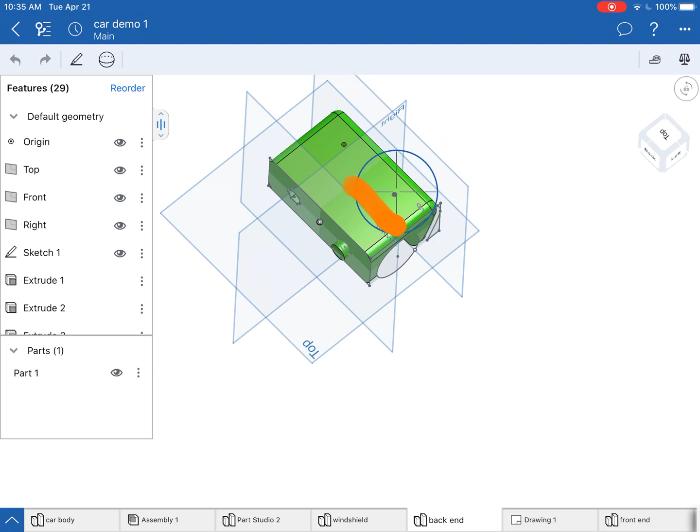I've made some little exhaust pipes, the cutout for where the wheel's going to be, and then obviously how it's going to be able to link in to the other part of the car. You'll notice on mine too, because I was going to put that fin on there, I created a couple holes for that fin, these guys up here. I've created a couple holes for that back modular thing to be able to slip into to create another design element.

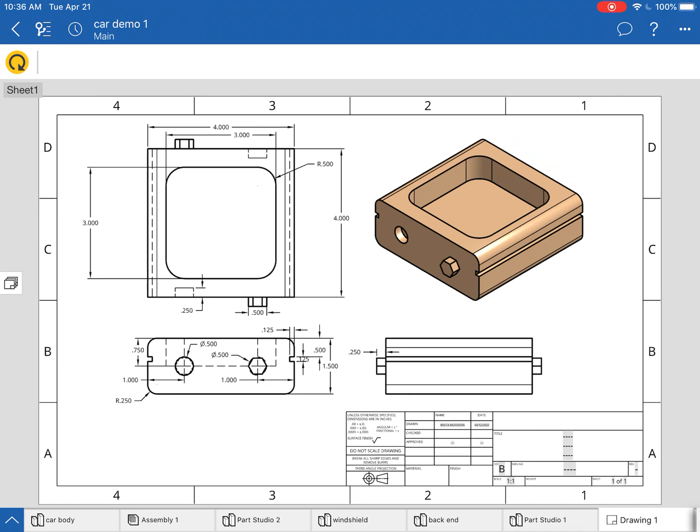All right, so let's get started. I'm going to go up here to the up arrow and hit the plus sign, and I'm going to create a new part studio. And that'll give me a blank area to work. Looking at the drawing, and I know some of you, when you click on the drawing tab, the drawing isn't opening up, so just make sure you have that PDF that I put on Canvas available to you to be able to open that up. You can see it's even taken a while on mine.

If I zoom in, this is the profile that I want to create. So I have 1.5 inches tall. I have 4 inches across, and then these little pieces, I have the circle on the left side, and I have the hexagon on the right side. The circle diameter is both 1/2 inch. The hexagon is inside of that circle, okay?

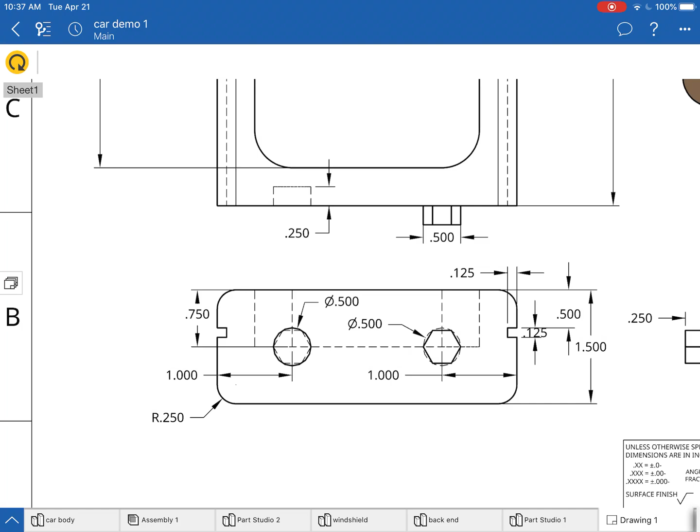You notice that they're located on the midpoint or the midline of that piece, and they are 1 inch in from the outside edge. There's also a 0.25 radius around the edges. So I kind of have those memorized. You might have to be flipping back and forth as you lay this thing out. Okay, so let's go into our part and get that set up.

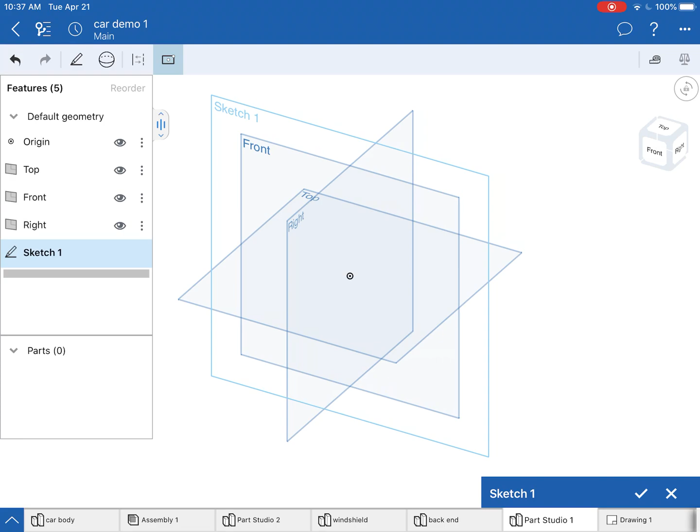I'm going to do a 2D sketch. I'm going to focus on the front plane. So I tapped on the front plane, and I'm going to do a center point rectangle. I'm always doing center point rectangles, and you'll see why. I use these planes as mirror planes when I have a feature flip over. So it's good to start everything on the center.

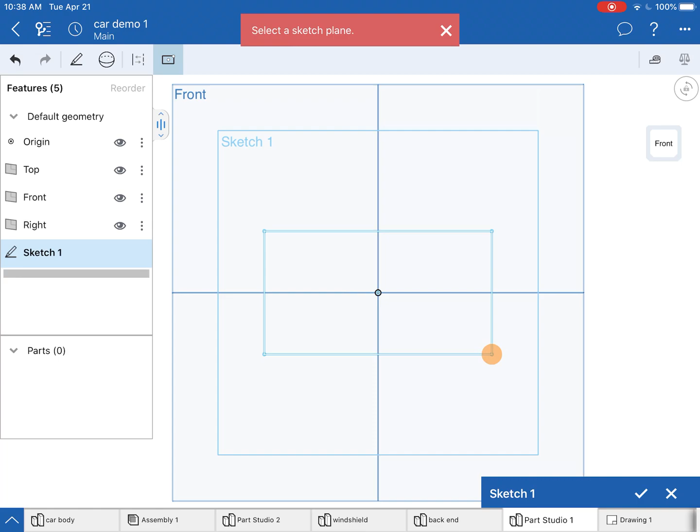So I'm going to tap with 2 fingers on the background and then click View Normal to Sketch Plane, and that'll open that up. Let me go back, choose that center point rectangle again. It wants me to pick my plane, center point rectangle. I'll start in the center on the origin, then I'll tap out here just to give me a rectangular shape, and then I'll add my dimensions to it. I'll add my 1.5 inch dimension over here, and I will add my 4 inch dimension over there.

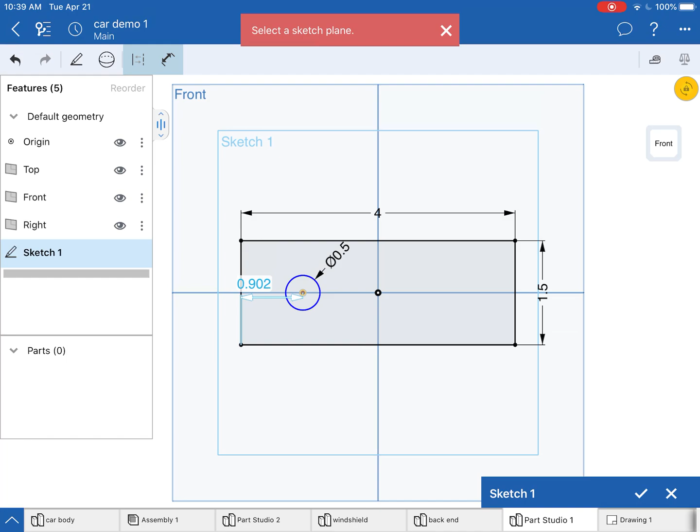Okay, and then I'm going to lay out those circles and the hexagon for this thing to be able to snap into. So I'm going to do a center point circle, and I'm going to hover right in there, click outside to create my circle, and dimension that circle to be 0.5 inches, and I want that circle to be, you remember if you press and hold, that will give you the precision tool. I want that to be 1 inch from the outside. Okay, now over here, whoops, go back to my sketch tools.

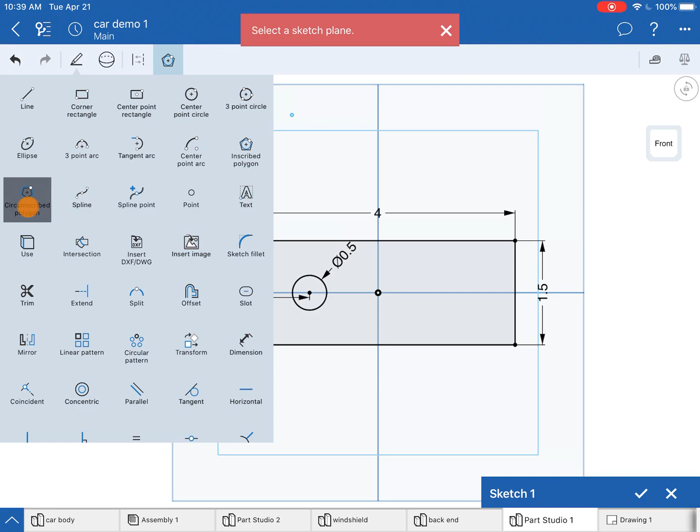I want a circumscribed polygon, this tool. Up here there's an inscribed one where the polygon is on the inside of the circle. That's not the one I want. I want the one with the polygon on the outside of the circle, this one over here. I'm going to lay the center of it down right there, and I'll click on the outside, and there it says 6. If I wanted to change the number of sides, I can tap on that 6 and change it, but I don't. 6 is what I want.

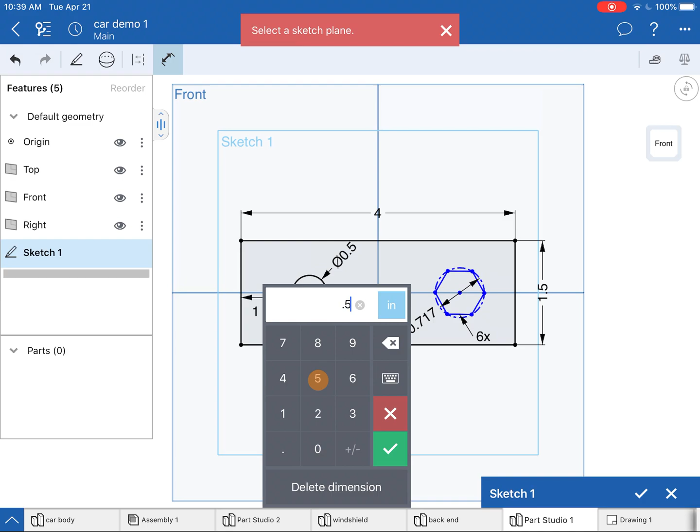I'm going to create my dimension, and I'll click on the outside of that circle, and that dimension is going to also be 0.5, and the dimension to the center point is going to be 1 inch.

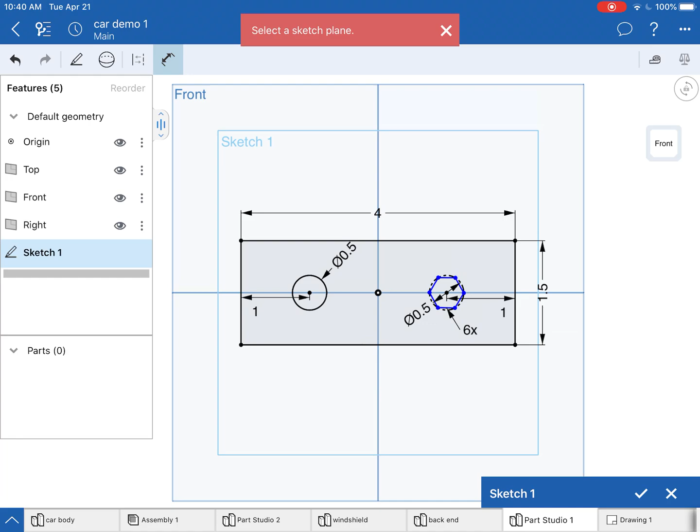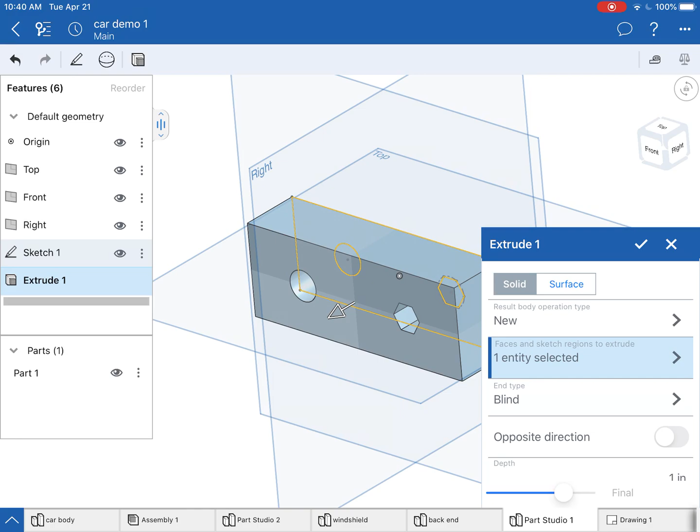All right. At this point, I want to do some extruding. Because I want the circle to be on the left, I'm going to extrude away from me right now. So I'm going to hit the 3D button, extrude. I'm going to click all 3 of those things. Okay, all 3 of those points, and I want to go in the opposite direction.

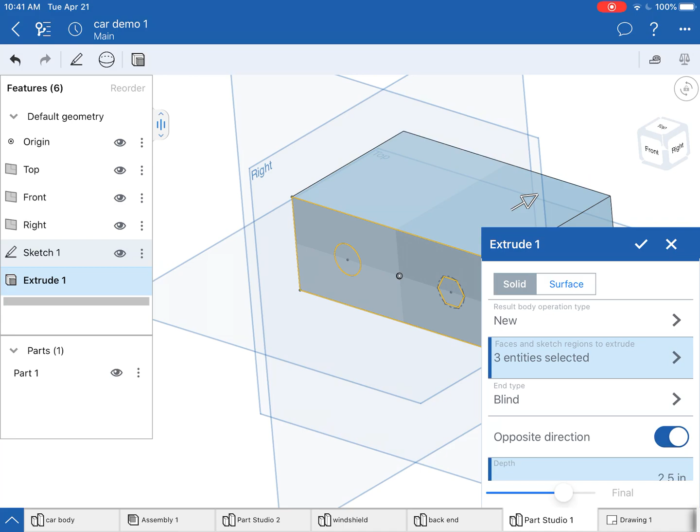And I want this to extrude. I don't want it to be as long as the front or the center, so I'm going to choose 2.5 inches. And here's where you're just going to have to consult your design to know if you got a long back end or a short back end. All right, and now I'm going to finish that extrusion.

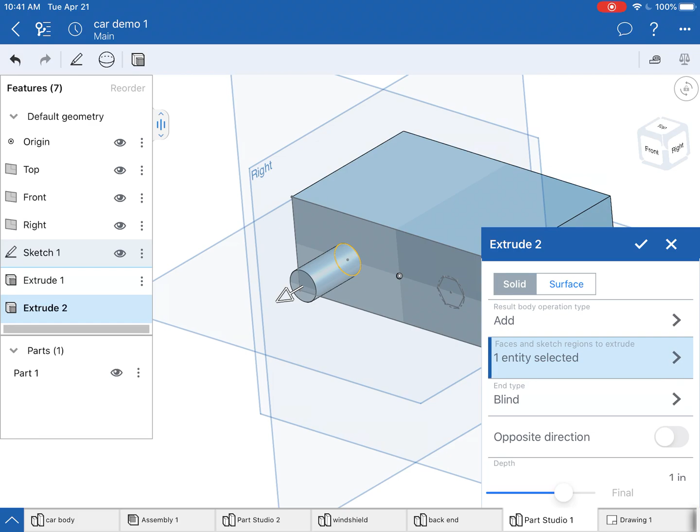And if you notice, the circle and the hexagon kind of went away. So I want to turn on the eyeball for that sketch again. And I'm going to do another extrusion. I'm going to extrude, and I'm going to click on the circle. And the circle I do want to stick out away, and I want that to be 0.25 inches. I'm going to finish that extrusion.

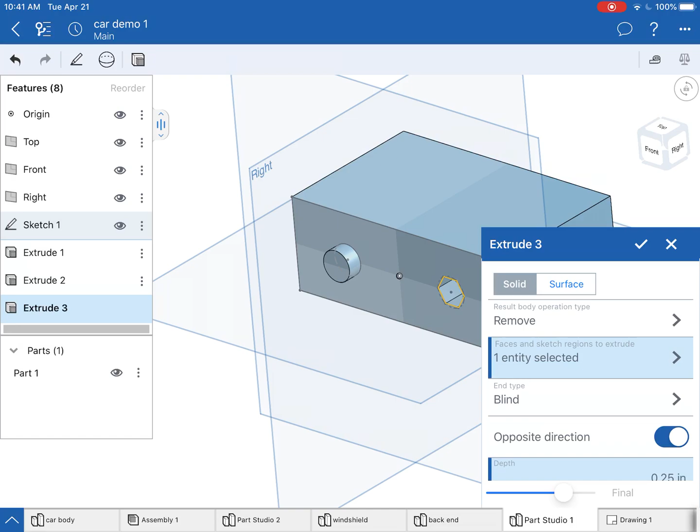And then I'm going to hit the 3D button, extrude again. And now I'm going to click on that. And this time, instead of adding on, I want to remove, and I want to remove 0.25 inches. There we go. So now if we look at my car body, you can see that it'll snap right in line.

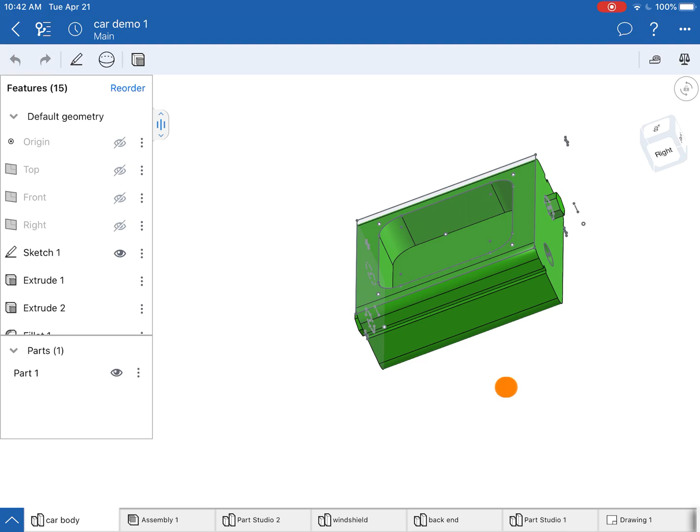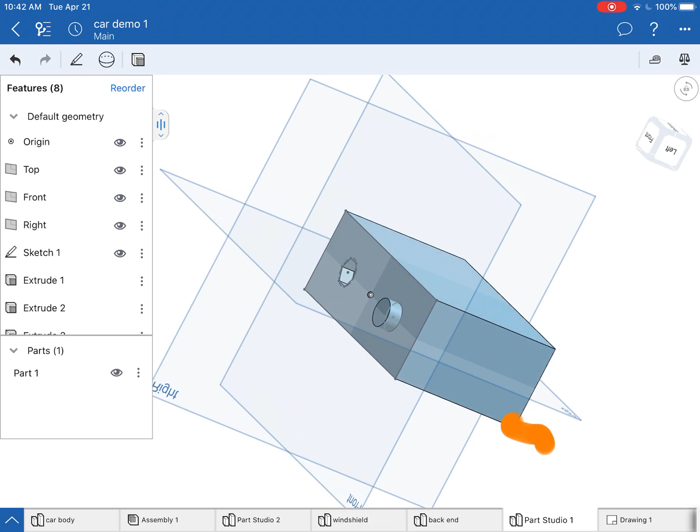If we notice this though, now that I'm looking at it, it looks like I need the circle to be on the right side of the vehicle and the hexagon on the left side of the vehicle. So that's going to cause me a little bit of an issue, but let's see what I can do. I could, if I wanted to, just flip that over. Now everything is upside down, but now the hexagon and the circle are on the appropriate sides to be able to snap in there. Hopefully you can see what I'm talking about.

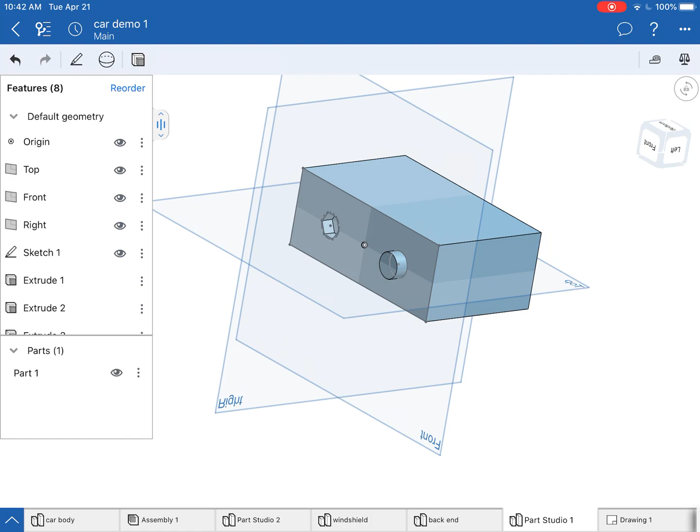All right, so I'm just going to keep that upside down at this point. I could start over and move those things, flip-flop them, but I'm just going to leave it like that. All right, so my next sketch, it's asking me to select a plane. I am going to choose this plane right here, the back profile. Double tap on the background, view normal to sketch plane.

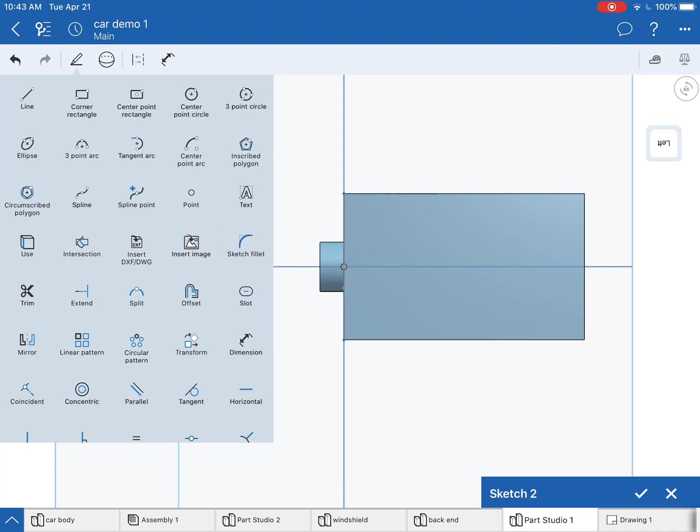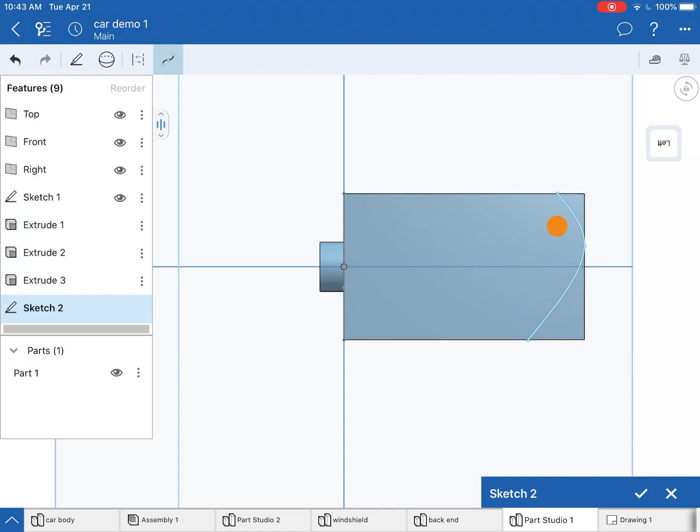Good. And I'm going to choose my spline tool, and I'm going to create kind of a curved shape to the back. So I'm going to use my precision tool to pick an area back in here underneath the car. And then I'm going to come up and choose an area back there. And then I'm going to come over and pick an area right there. I want to cut all that off. You can change those around if you want, but I'm going to cut all that off.

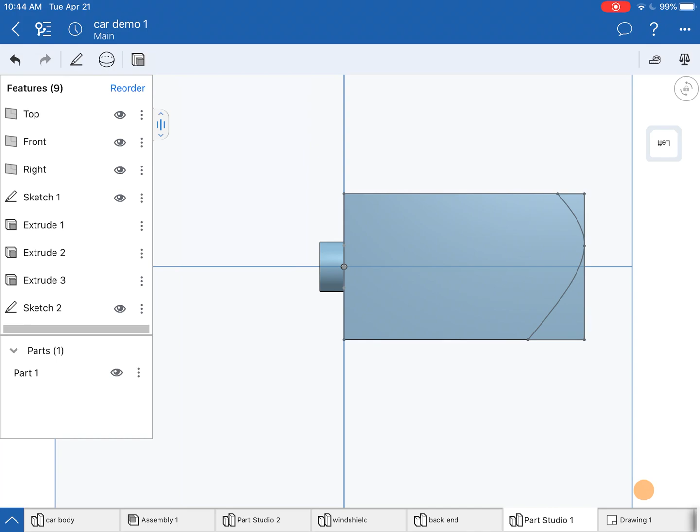So in order to create a closed shape, I'm going to go grab my line tool now, and I'm going to snap around to all of these points to create a closed off shape. And I'm going to finish that sketch. Okay, now I'm going to go to extrude and cut.

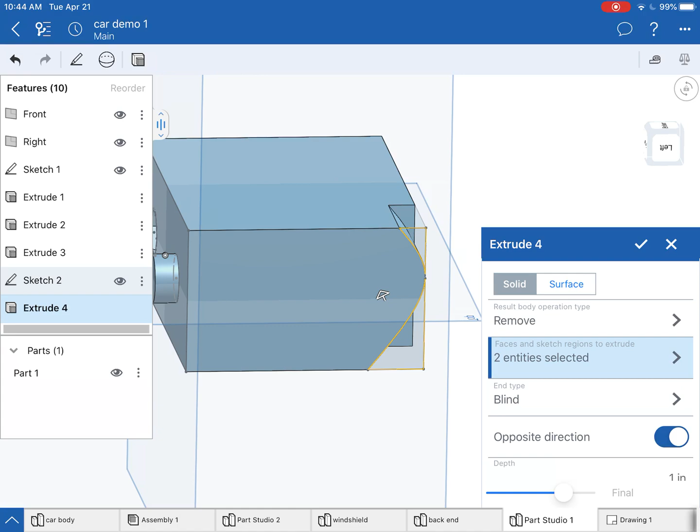Go to remove, get that thing visible. I'm going to choose that section and that section. And you notice it's only going back 1 inch. So I want to change it from being a blind extrusion to through all, and finish that extrusion. There we go. That changes the back end of my car a little bit.

Okay, now I'm going to do another sketch on this plane. Make sure you select the right plane. If you rotate, you can make sure that you're on the side of the car. Sometimes you get kind of lost on what plane you're actually clicking on. I'm going to double tap and view normal to sketch plane. And now I'm going to create a cutout for my tire.

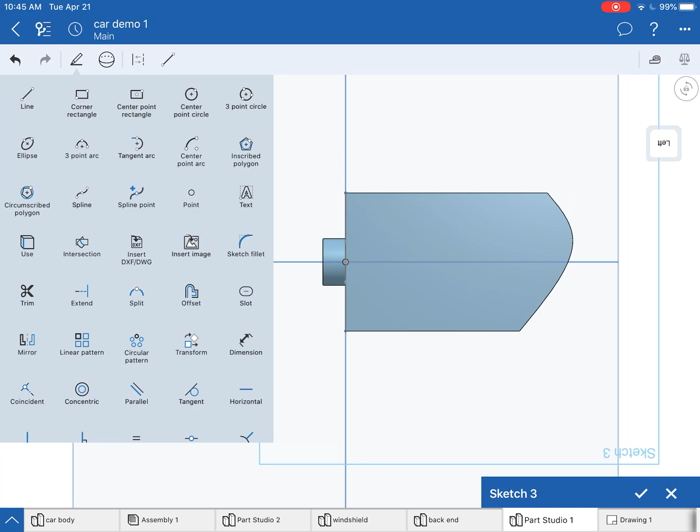So I'm going to create a center point circle. The wheel is not going to be in the middle of the car. It's going to be near the bottom. It's going to be something like that.

Now, if you've forgotten what your dimensions are, you can go back to your initial, or I should say, if you have a partner on this thing, you're going to have to communicate with your partner. They're going to have to share their part with you. Let's see.

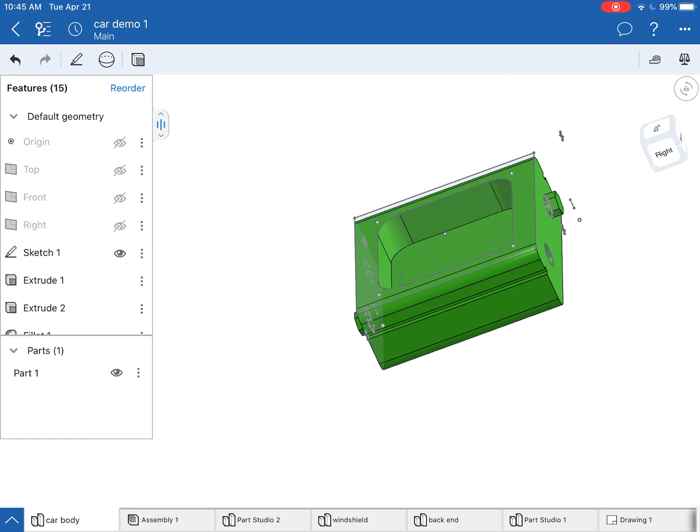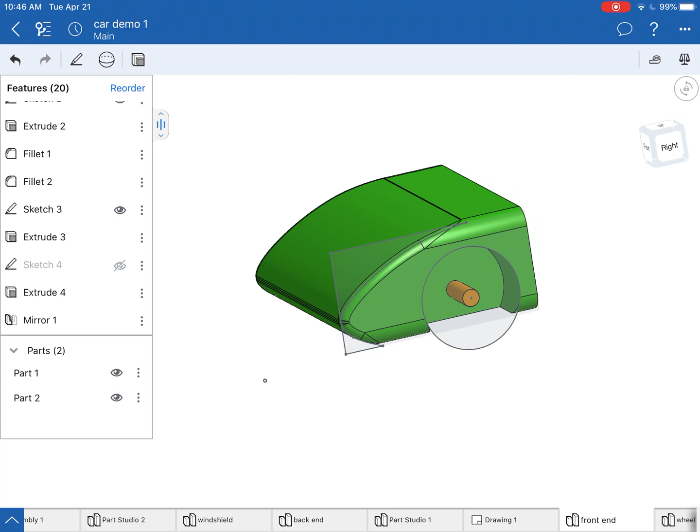There's the front end of my car, and you can't see any dimensions on here. So I'm looking for the eyeball, that eyeball that has a circle on there. If you just click on these eyeballs, you can see what sketch is associated with it. So if I turn on this eyeball, I can see that's my wheel cut out. I'm going to hit the three dots next to it and say show dimensions.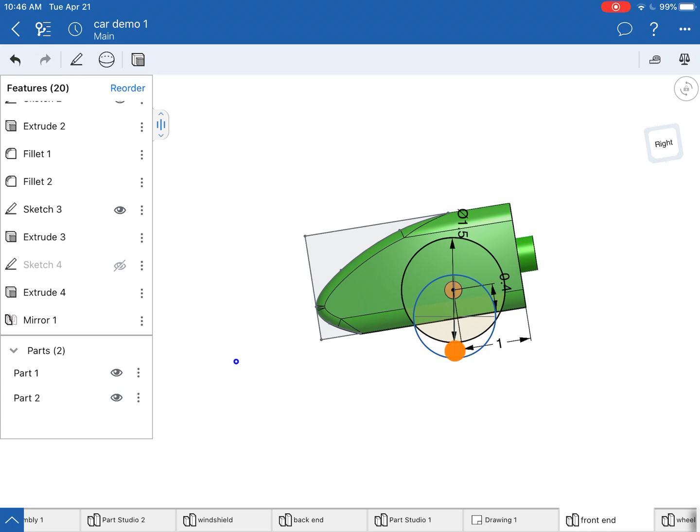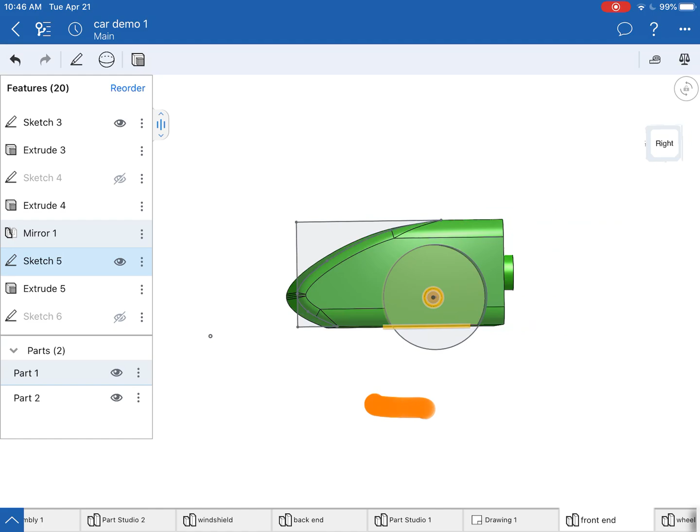There we go. So this shows me that I have a 1.5 inch circle on the outside, and I have 0.4 inches from the center point to the bottom. And I remember that I made a 1/4 inch circle hole for that axle to fit into. You can find the sketch that I did that in as well. I think it's that one, sketch 5. I can show dimensions on, and you'd be able to see what I used for that dimension.

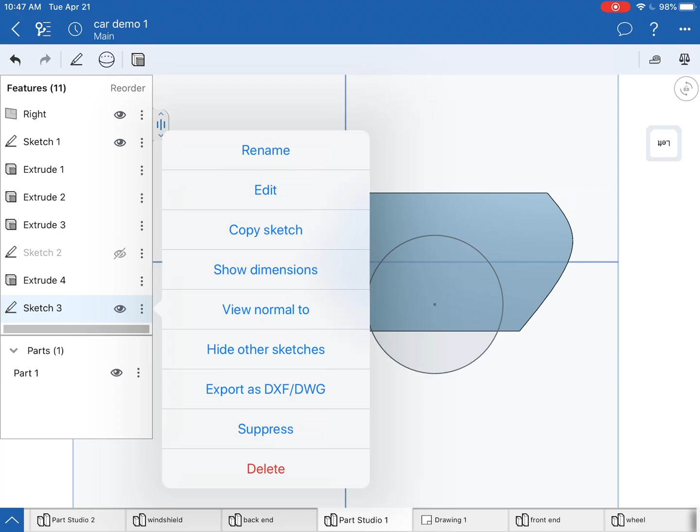Okay, so let's go back and use those for my back end. So I've got to make sure I'm editing the right sketch. I can't just start clicking on things. I need to go into that sketch 3 that I was doing and edit it. Hit the dimension tool, click on the outside of the circle, and that is going to be 1.5 inches.

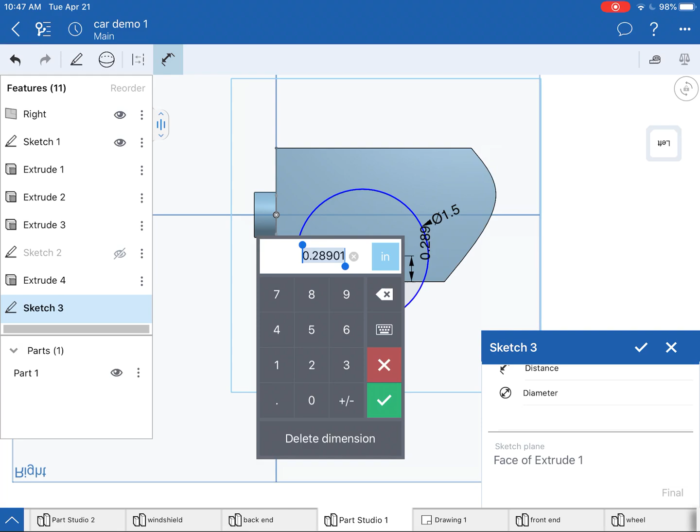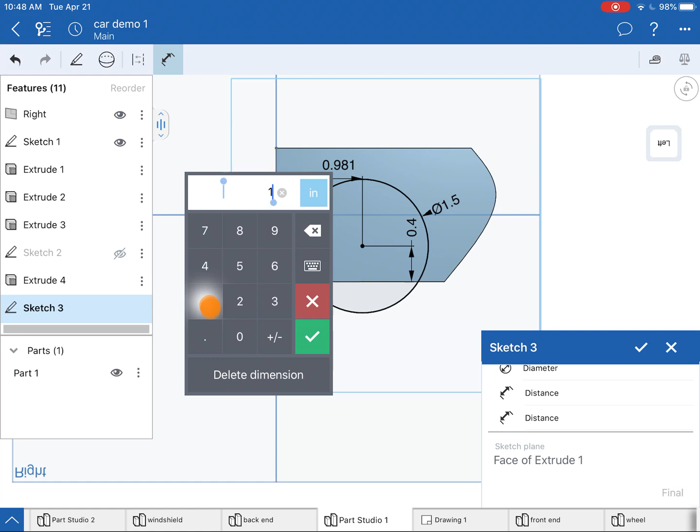And then the other dimension I'm going to use is from there to this line. I'm going to make that 0.4. There we go. That should be at the right height. Now I'm just going to pick a good distance, centered on that part, the best position the way I want it. So I'm going to see what that dimension is. It is currently 0.98, which is really darn close to 1 inch. So I'm going to make that 1 inch just to make it a nice even number.

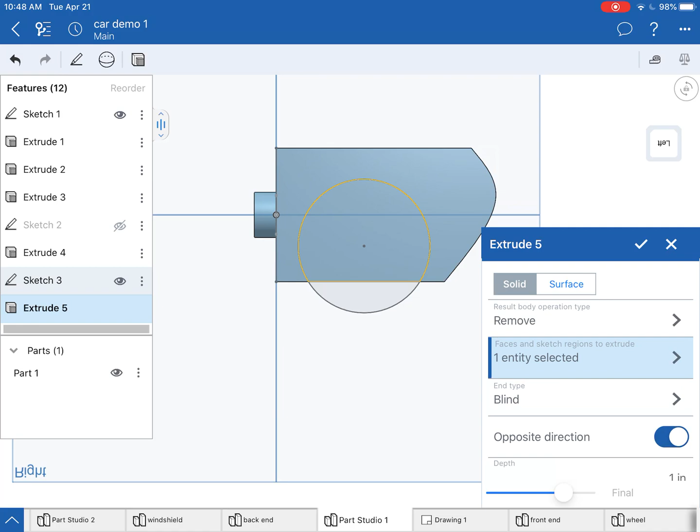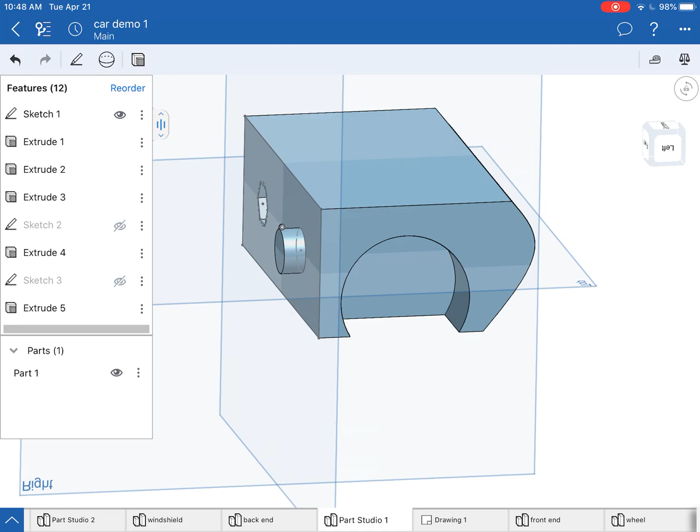Okay, and let's cut that out. So I'm going to finish that sketch, and I'm going to go into my 3D tool, extrude. I'm going to do a remove on that area. And I want this to go back the same depth that I had on my other part. You can go back and check your partner's drawing, or if you're doing both parts, your drawing, and that is 0.75. Okay, and finish that extrusion. There we go. Now I need the axle hole cut out of there.

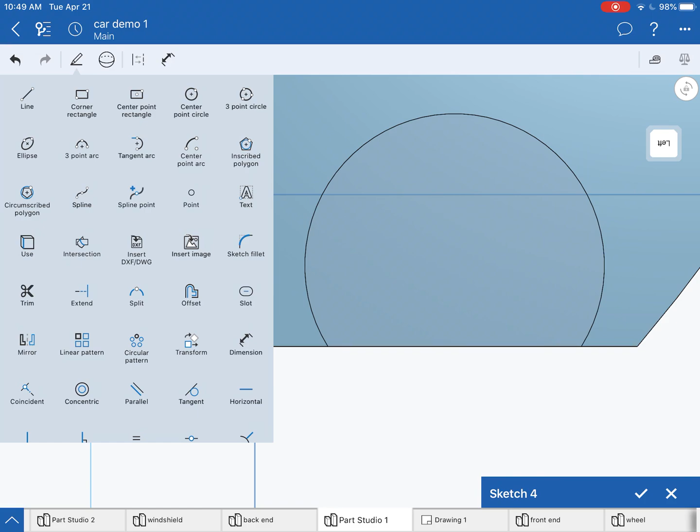So I'm going to do a 2D sketch, and I'm going to choose that plane. I hovered over it to select that plane in there. View normal to sketch plane. So now I'm sketching on this interior part of the circle, and I'm going to do a center point circle. Actually, what I'm going to do is turn on sketch 3 so I can see where that center point is. So I just hit the eyeball so I can see where the center point is.

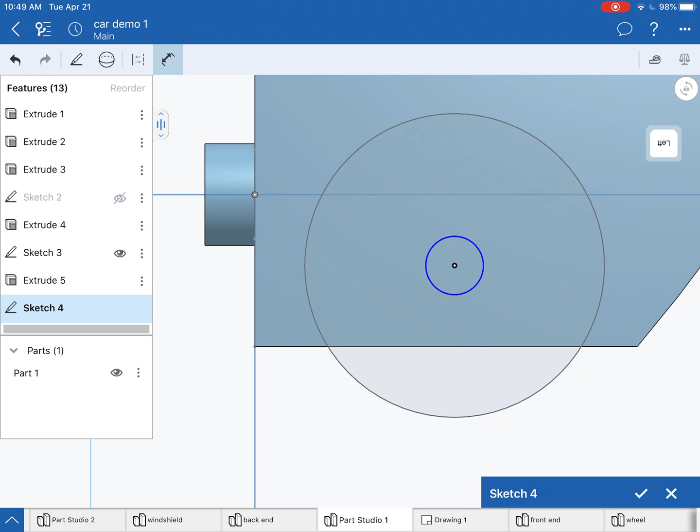And I'm going to use a tool called use. It's kind of like project geometry. And I'm going to just click on that line so that I can now use that point on this next sketch. All right, now I'm going to use my center point circle. Click on there, click outside of it, and then dimension it to be 0.25. There we go.

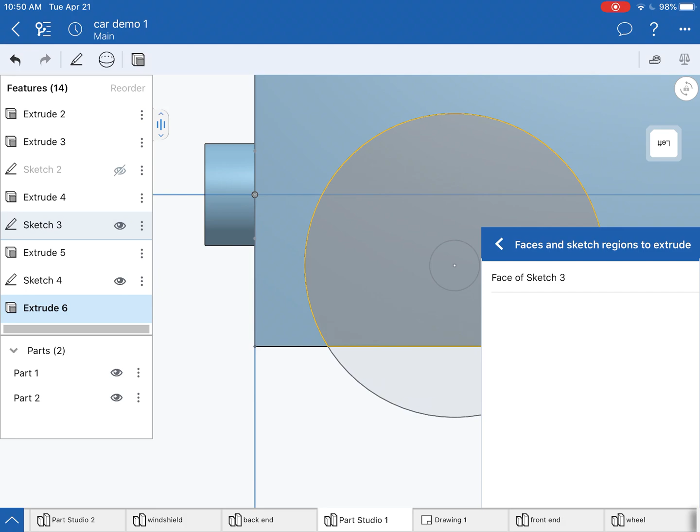Finish the sketch. Go up to your 3D tool, extrude. I don't want to extrude that. So you can see where it says here one face selected. I don't want that face selected, so I'm going to delete it. And I actually want just that center part of the circle selected. All right.

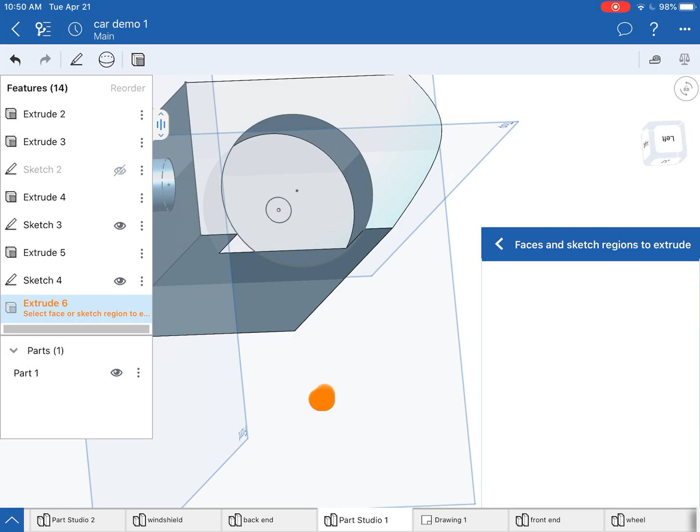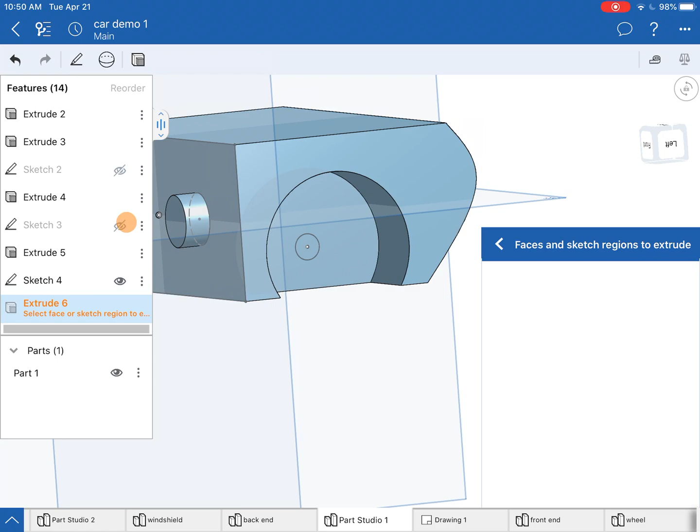I don't know why it's not allowing me to actually select that. I'm going to turn my eyeball off of sketch 3 and see if that will allow me. There we go. So it was wanting to select that outside circle, so I just hit the little eye to make that sketch go away. That would allow me to see underneath it. Okay, so that's what I want to do.

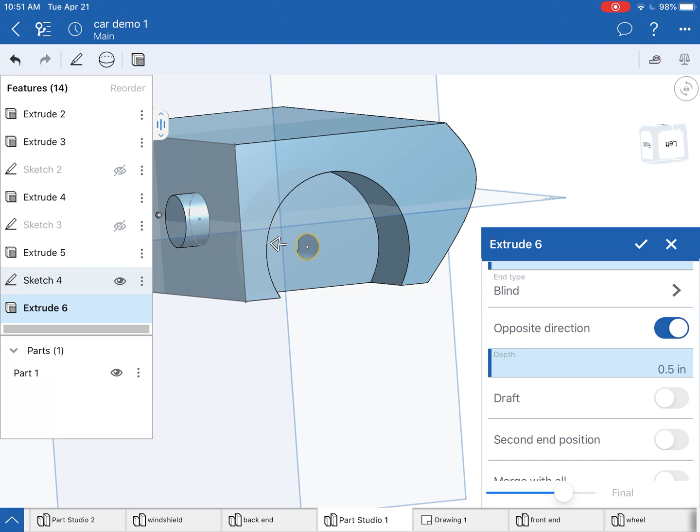But I want this to be a hole. So I'm going to click the back arrow on this, and I'm going to choose this to be a remove, because my axle is going to fit in there. And I'm going to have this depth be 0.5. That's what I did on the other part as well. All right, so there we go.

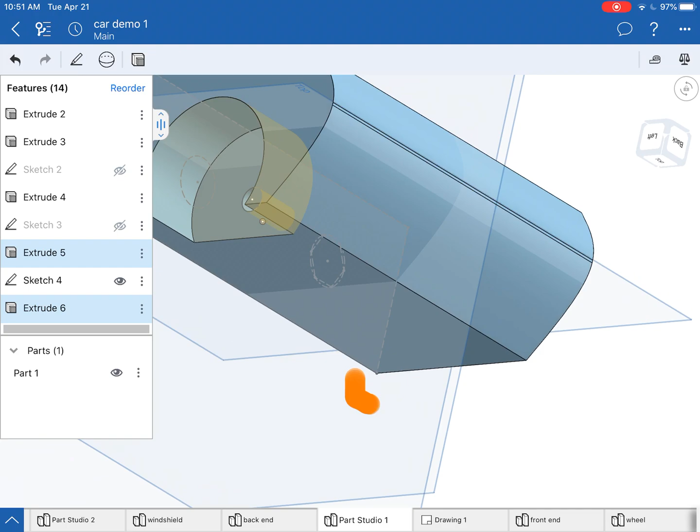So now if you look over here, I have extrude 5, which is that circle, and extrude 6, which is the axle hole. Okay, so now I'm going to show you how we can mirror this wheel cutout to the other side. So I'm going to double tap in the background to let go of both of those tools. I'm going to click my 3D. There's two different mirrors. I'm going to 3D mirror that feature.

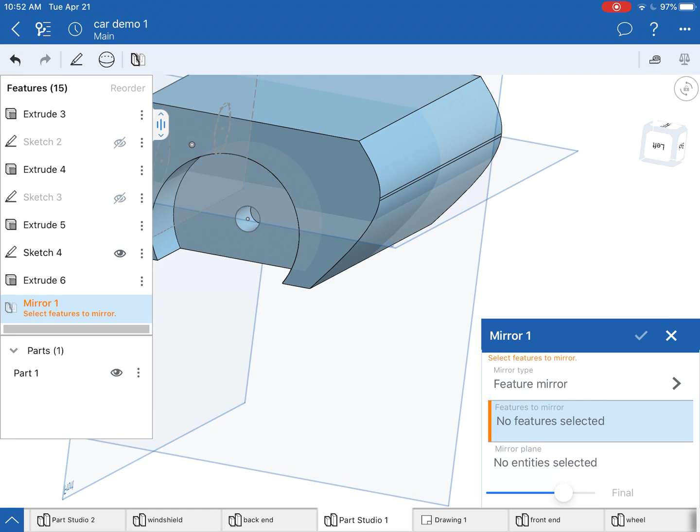So if you look at mirror type, I don't want to mirror the whole part. I just want to mirror features of that part. And now it's asking me which feature do I want to select. So I could hover over those things, but I know that that was extrude 6, which is that hole, and extrude 5. So I'm going to click both of those things.

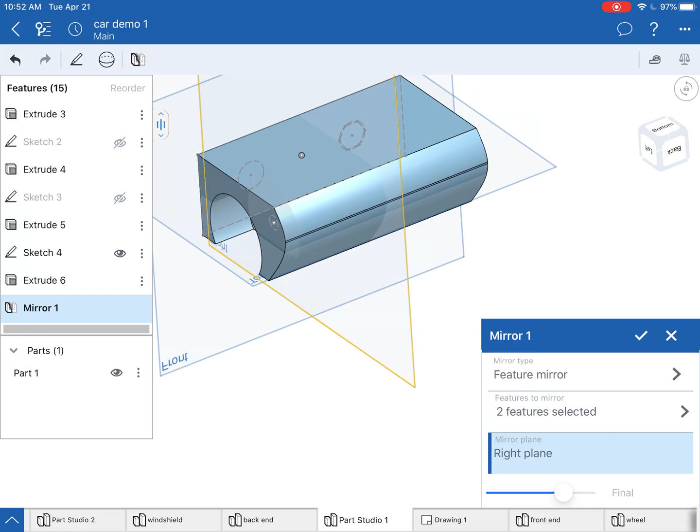Now directly under there it says mirror plane. So the mirror plane I want to use, if we zoom out of here and rotate a little bit, is this one that's cutting my car right in half. That's why I started on the origin. So I'm going to select that mirror plane right there. And you're going to see those two parts pop over onto the other side of the car. I'm going to click done. So now I have kind of the shape with those cutouts on both sides.

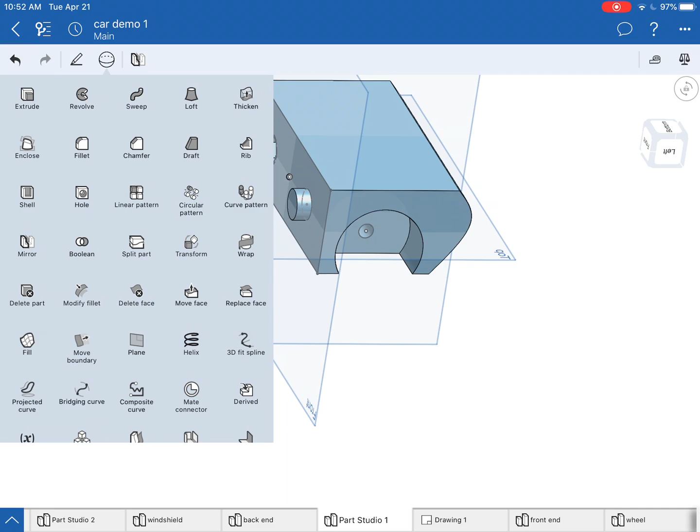All right, next thing I'm going to do is I'm going to create some fillets. So I'm going to go to my 3D, I'm going to go to my fillet, and I know from my drawing again that I'm doing a fillet that is 0.25. I'm going to tap the edges that I want to be curved. So I'm going to click that one and that one, this one, and this one more back here.

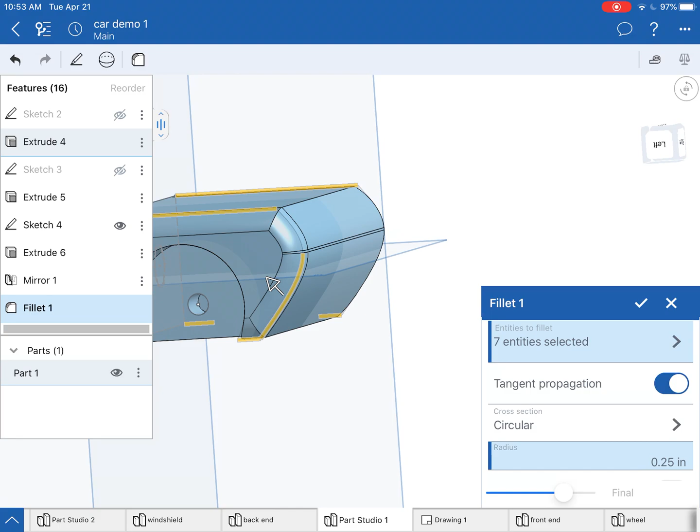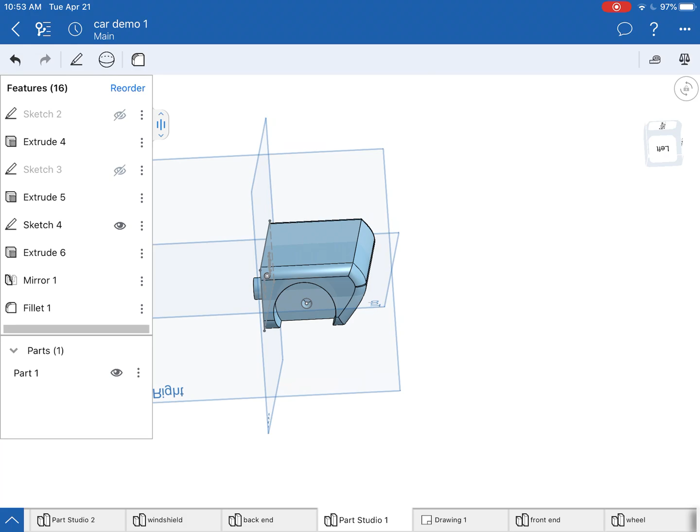All right, so now the back of your car you can leave kind of sharp like that, which looks kind of cool, or you can round over that part as well. If I clicked on this edge I can round over those edges as well, but in this particular, well, I'll do it. There we go. So you just click on all the edges you want to be rounded over. I'll leave the top squared off and the bottom squared off. And I'm going to hit the check mark. So there's kind of the shape of my car.

So the last thing that I'm going to show you is how to do some detailing on the back edge of the car. And we don't have any plane to click on to do some sketches over there. So I'm going to actually create a plane. And this is going to be a new thing for you. I'm going to hit the 3D button. And then right in the middle you'll see plane. And it says no entity selected. It wants to offset a plane from another plane.

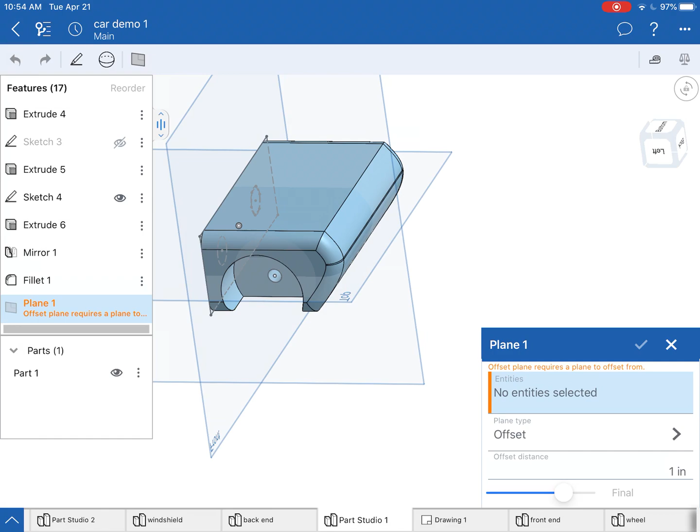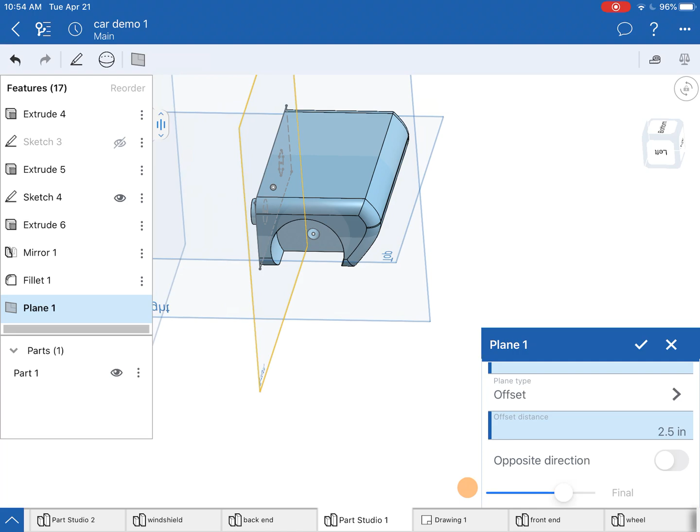So I'm going to click this plane, and you can kind of see that it's moving in that direction. And I want to place that plane right on the back edge. And if you remember, my first extrusion was 2.5 inches. So I want this to be 2.5 inches, and it moved further away, but I wanted it in the opposite direction. There. Now you can see that plane is right on the back edge of my car, which is where I want it to be. So I'm going to hit the check mark.

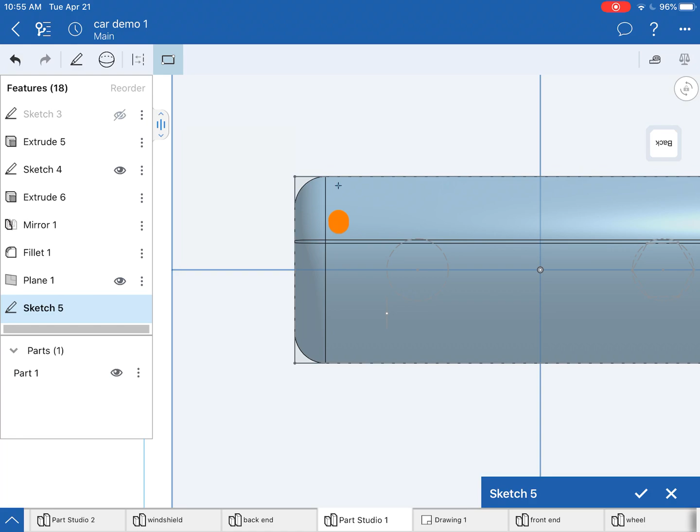Now I'm all set up to do a sketch on that back plane. View normal to sketch plane. And I'm going to create a light fixture back here. So I'm going to kind of come down. You know what? I want to make, instead of that, let's back.

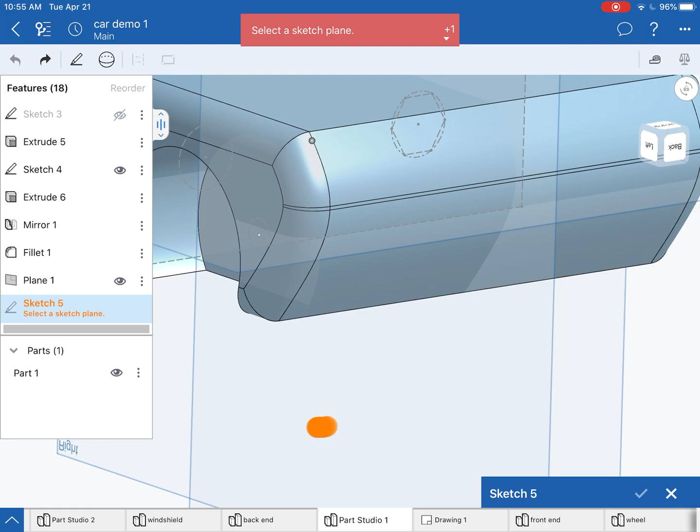Select that plane again, except this time we're going to use a line. Go view normal.

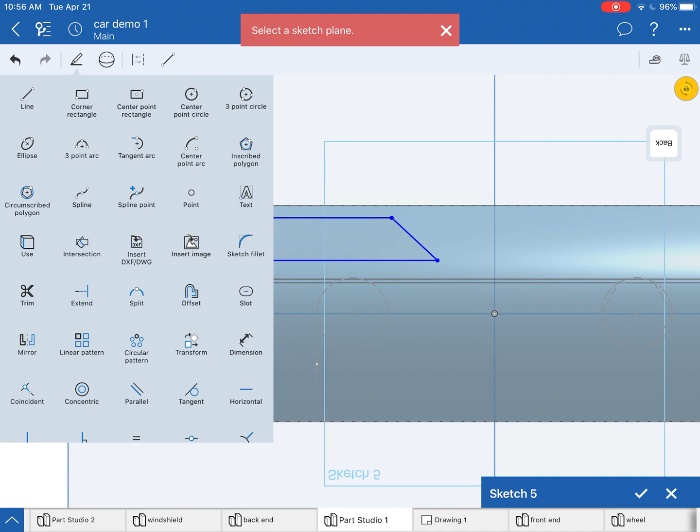Okay, so I'm going to drop down a little bit. I want this thing to be kind of angled, kind of like that. Notice that I tried to make that last line, when I hit the line tool, straight up and down, but I kind of missed it a little bit.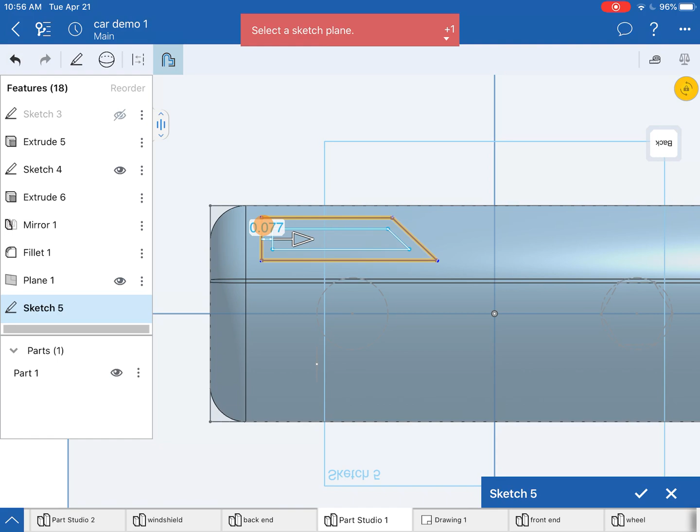So I can come over here to my constraints and make that vertical, and you can see it kind of twisted itself. Now here's another little trick. If I select all of these lines and go to my sketch tools, I have a tool in here called offset, and I can bring that arrow to the inside there and tap it, double tap it I guess, and make that 0.05. So I created a little offset just like that.

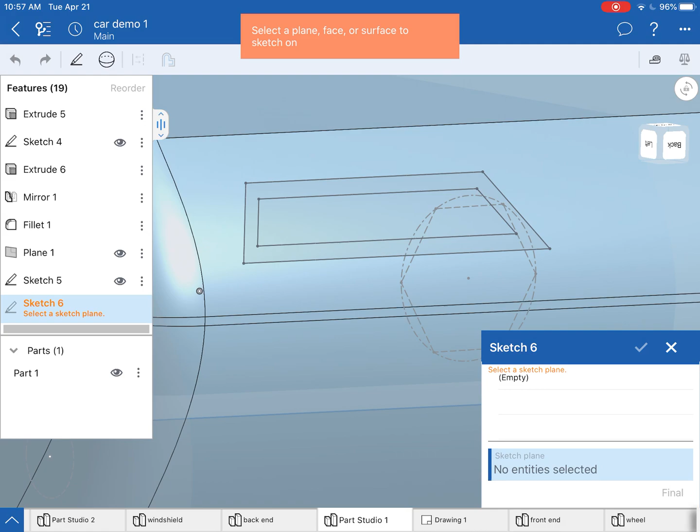I'm going to finish that sketch and rotate it around a little bit, and now I'm going to do an extrusion on that cutout. I could put some fillets on there if I wanted to. I can change all that, but I'm going to leave it kind of straight for right now.

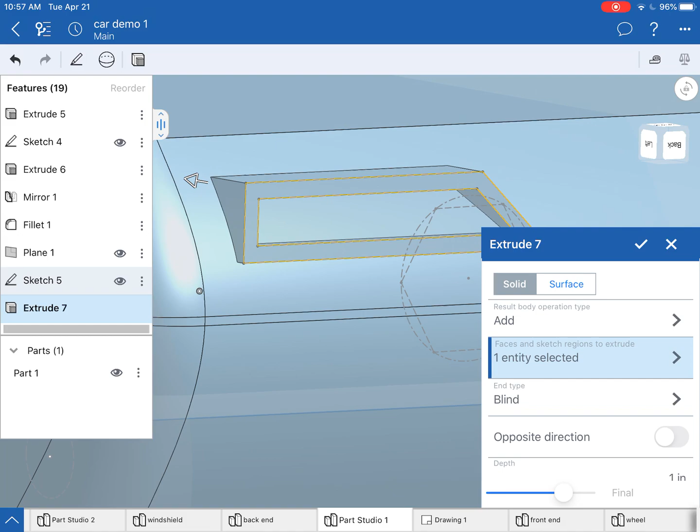I'm going to hover right over that orange part. I don't want to be doing a sketch, I want to be doing a 3D extrusion on that part. Boom, right there. So that would be adding to, and I don't want to add to, I want to actually remove on this particular one because I want to cut it out.

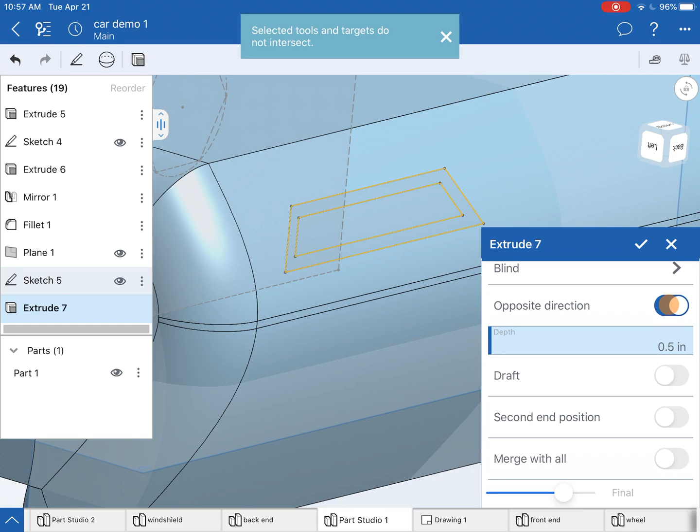I'm going to say I want this to be a blind cut. Here's where I'm just going to pick some different dimensions till it looks how I want. So instead of it being 1 inch, I'm going to say 0.5 inches. Let's see what that looks like. Oh, I need to go in the opposite direction, I believe, or click that. There we go. So now that's cut into my part.

That looks like it's really too deep, so I'm going to change that to 0.25. I just want to cut in just a little bit. That looks a lot better. And finish the part.

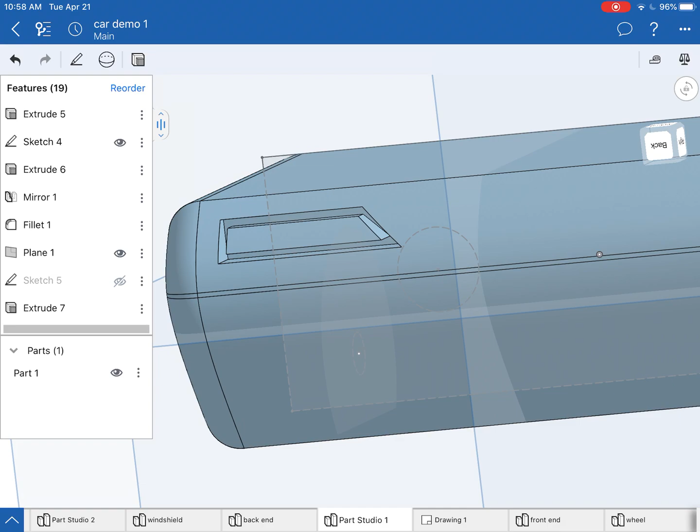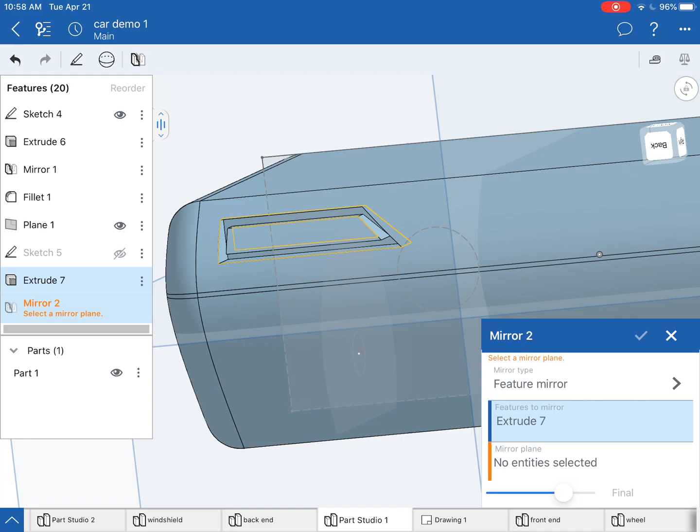Cool, and now you can see that's extrusion 7. I can flip that to the other side just like I did before, so the 3D mirror tool. I can select extrusion 7. Oh, I don't want to mirror the part, I want to mirror the feature. I want to choose extrusion 7 as my feature, and then it wants the plane.

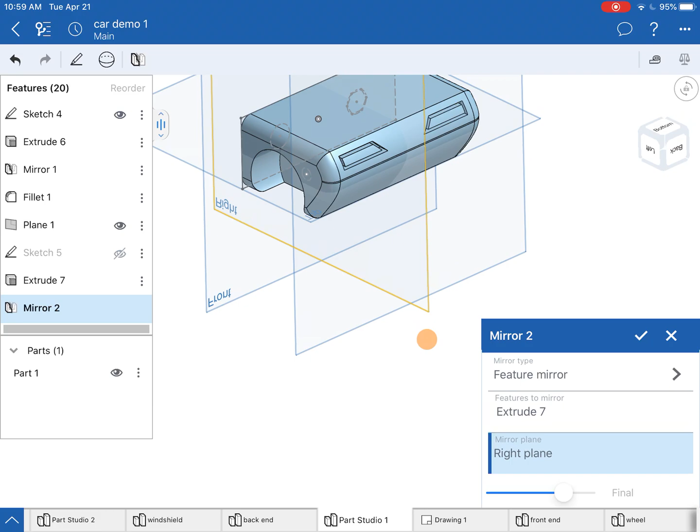I'm going to zoom out so I can click on that plane. And I know that, whoops, I got to click on mirror plane first. Now I can choose that plane, and there it pops up on the other side. So there's my taillights on my vehicle, using that mirror tool.

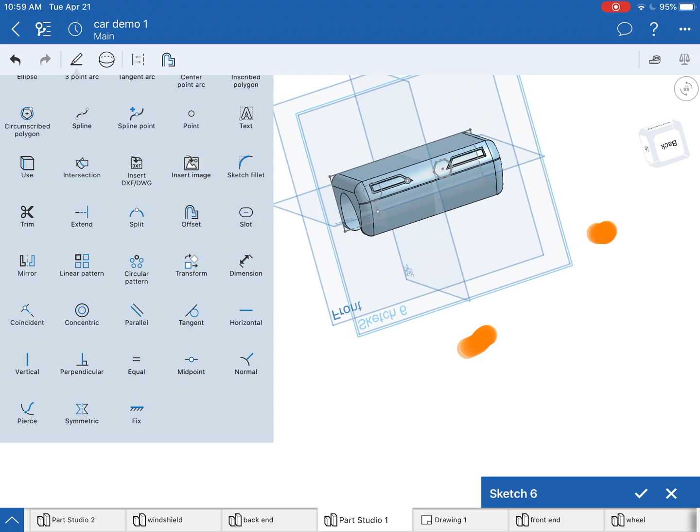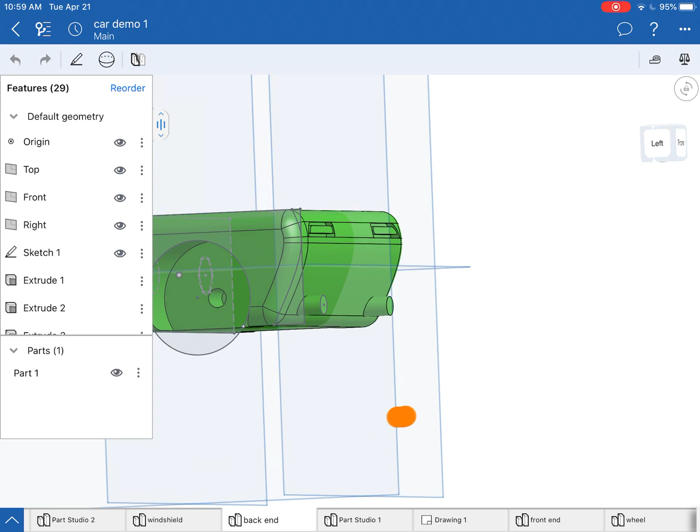The last thing I can do on this is another 2D sketch on this back plane right here, and I can add those little circles, but I'll let you do that on your own. I'll show you what I did on mine, and then you can do it on yours. On that plane I created 2 circles - I created 1 circle, I should say, on the left side. I extruded it towards the car, and then I mirrored that feature over to the other side.

Okay, and that's that. So if we check that part out again, it looks just like that. There we go. Now if I wanted to change the color of it, I can come over here to appearance and change the color.

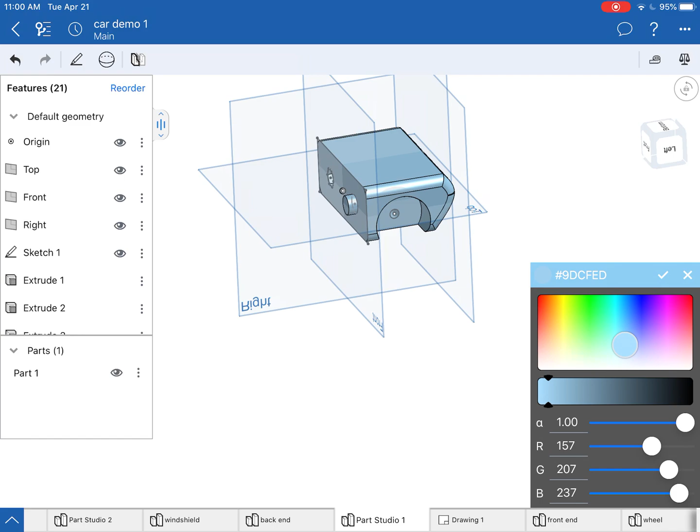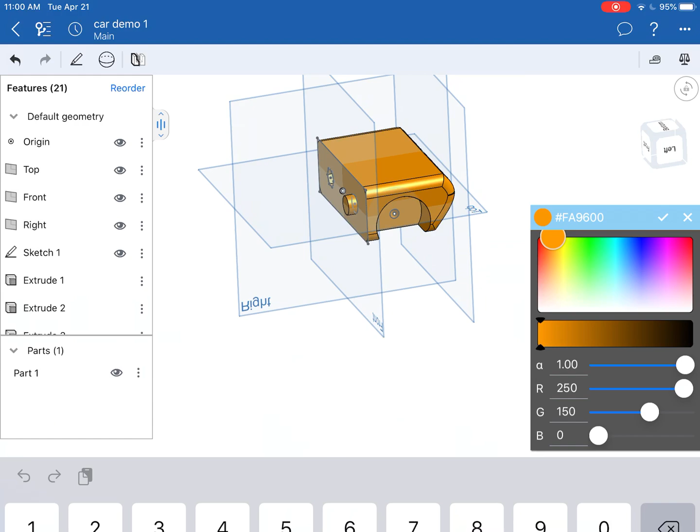The way that I got all of my parts to be the same color is I paid attention to what these values were, and I tapped the same number. So I hit the little keyboard to let that go down. To get that orange color, I know it was 250, 150, and 0. That gives me that bright orange color that I have on my cars.

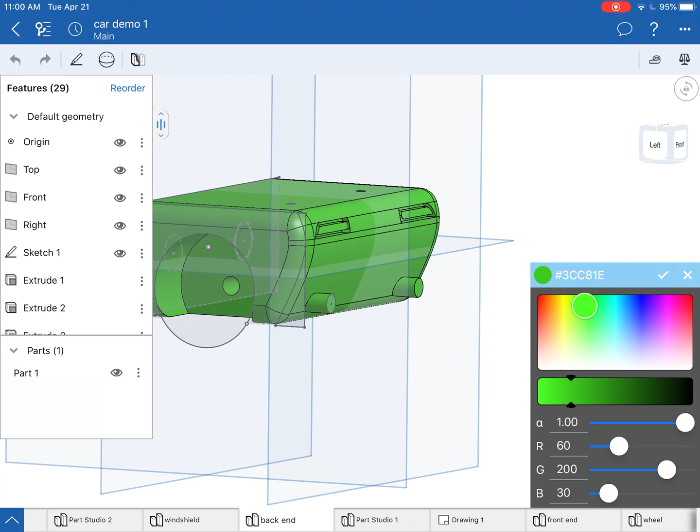So you can check those things on your various parts to see what your car's actual colors are. Click on that, go to appearance, and you can see this one is R60, G200, and B is 30. So that'll give you that green color if you wanted to color everything the same. That's that.